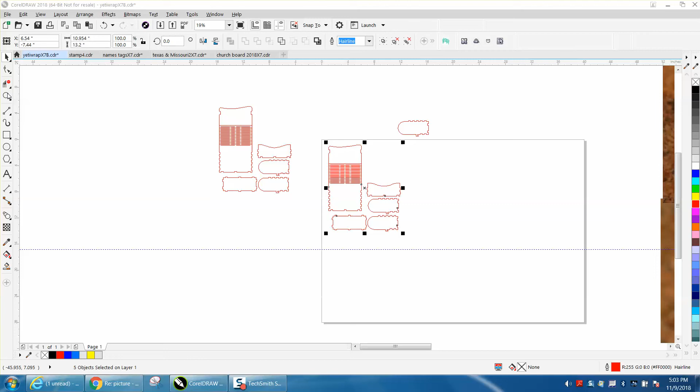Hi, it's me again with Corel Draw Tips and Tricks. We've completed our box, but we need to do a test cut, and then we need to compensate for the kerf.

I've already made a complete duplicate of my drawing, and you want to do that because you're going to fix it and mess it up.

We only need to change the female parts for the kerf factor. I'm going to change all the females so it does not change our dimension, so everything will fit good. So we need all the female parts.

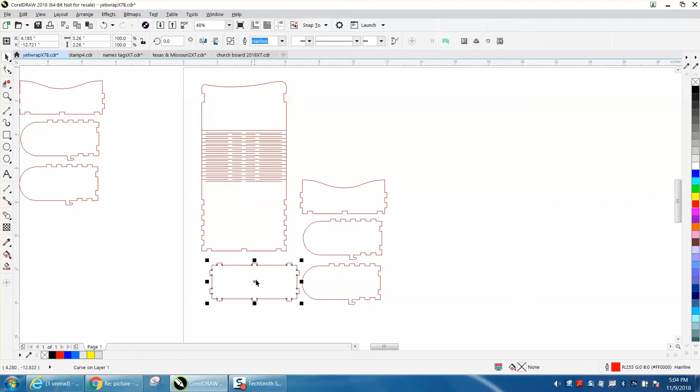We do not need this part. Since you have a duplicate, just delete it. This has all males, this has male and female, but let's just delete them.

These are the two test cuts we need to make. We do need that one. This one has some females and males, and we do need the males.

So this piece we're going to rotate 270 degrees. This piece will fit on this side. As you can see, the kerf is nothing—the lines are on top of each other.

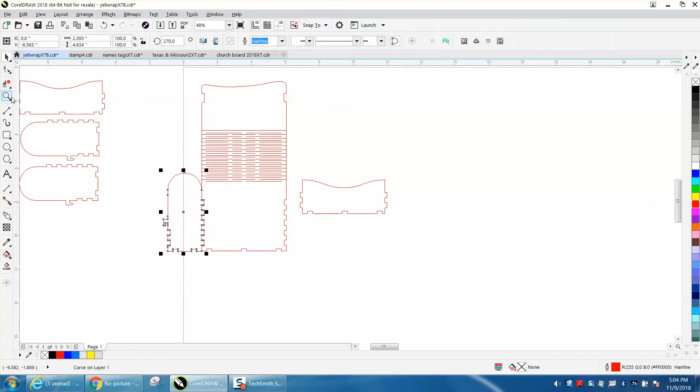If I place it right, it will be—as you can see, the lines are on top of each other. I think you could probably change either one, but if we change the females, you won't change the dimension and you won't get lost.

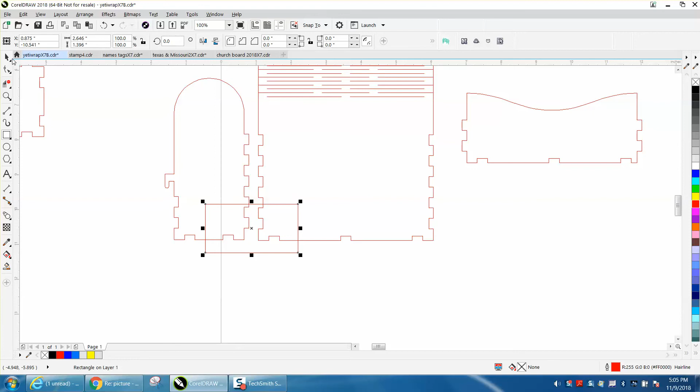Now I was going to show you how to do a test cut. We've got copies of everything. Just take a rectangle, take your virtual segment delete tool, and delete everything.

Delete that. You could actually go in here now and delete this line. It wouldn't really matter. Delete this line. So there's your two joints that you need to test.

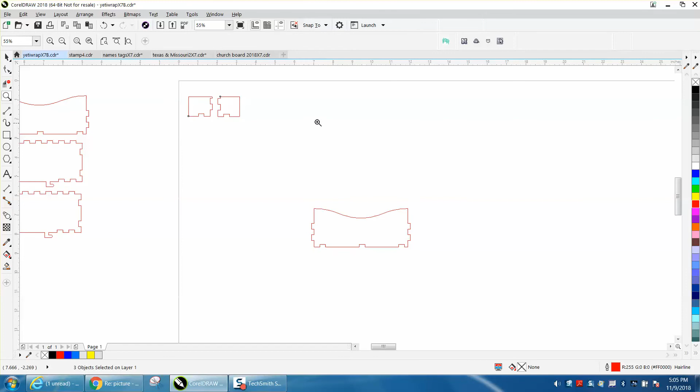Take less than 2 inches of wood, put it up top left corner, cut it out, and test it. I guarantee it's going to be loose because you're going to lose kerf—everything that cuts wood is going to take out a little bit, even the laser.

Normal kerf is probably like 0.03, but we're going to bring this back in now. That's why you made a duplicate. Control D, and we're going to go in and change just the female joints.

And we're going to change our nudge factor now—sometimes my laptop messes up like that—to 0.009.

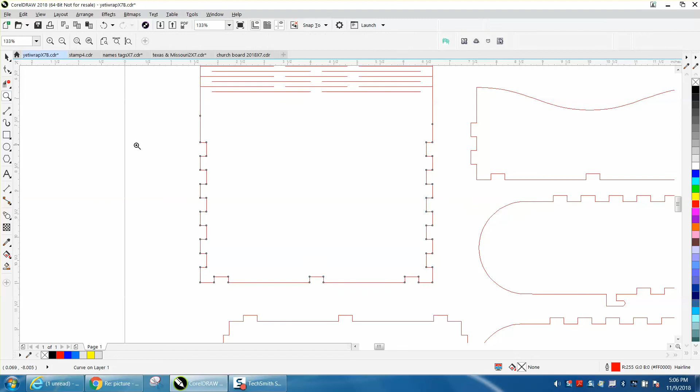Take our shape tool. You're going to have to click on it and ungroup it. Grab your shape tool and think about what you're doing here.

It wouldn't really matter if you did the inside or outside, but we're going to do the inside. I'm going to move this down one nudge. I'm going to go to this one, move it down one nudge. This one nudge, one nudge, one nudge.

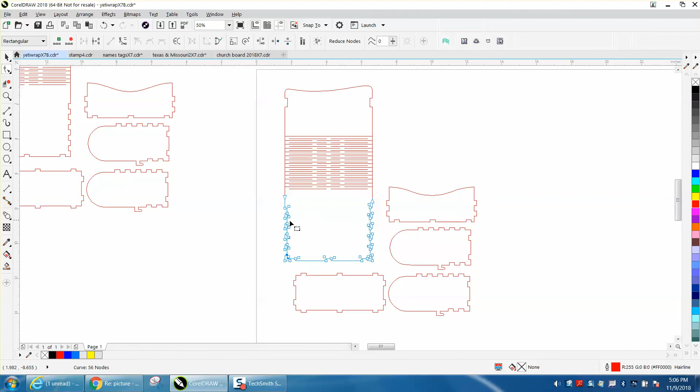So that's done that side, and you would need to do the equal on this side. We'll just go ahead and do it. I think I want to start at the top, one nudge down, one nudge down. So you're doing every other set, and all you're doing is reducing that space for that to fit in.

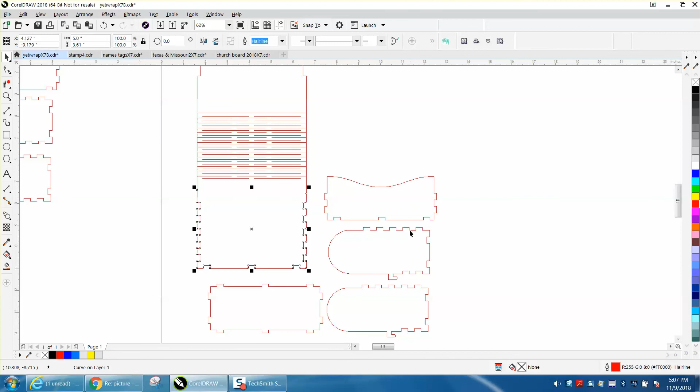Just kind of to prove a point, you would need to do that to all your female parts. If you're either going to do males or females, I did the females.

Let's rotate this thing to 270 degrees, let's bring it up. Once you've done them all, what I would do is do what I just did, and then do that exact same test cut. And there's the difference.

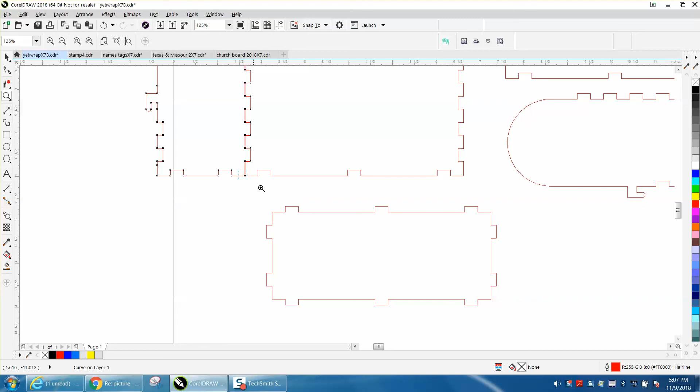You're that far—well, I must not be on here perfectly. I've got a little hiccup in this box, but so there's your kerf.

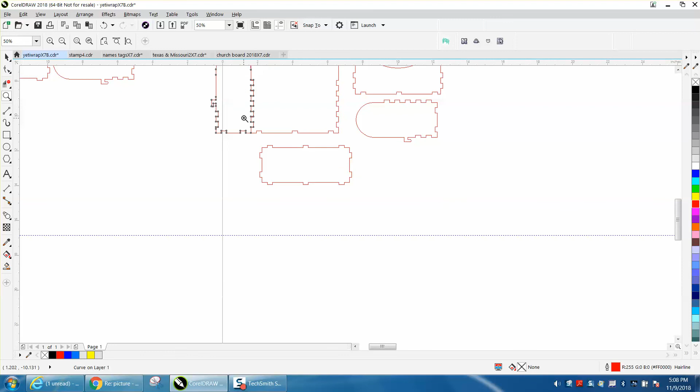That's going to help make the joint tighter because the male and the female are a little closer together. You might have to do that again, but if you do that and do a test cut, and it's too loose or too tight, just back off the number a little bit.

I truly hope that helps somebody. I've had several people wanting to make this box. Take it out the laser, make your test cuts. And I said in one video, the only other joint that might not fit is this clasp.

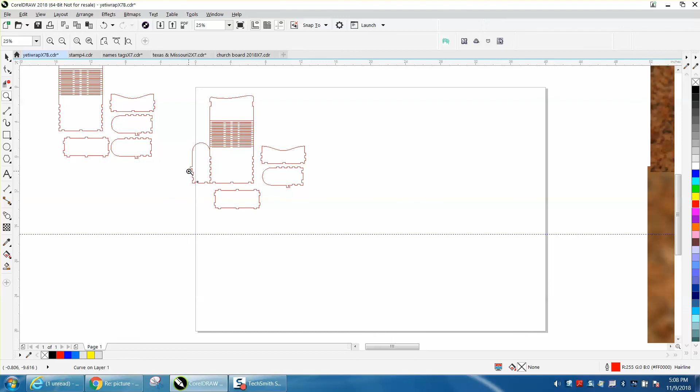If it bends around and doesn't quite fit, it's too loose or too tight, you don't have to recut this piece. Just move this joint up or down, and that's very easily done.

We'll just do it real quick. I've taken enough of your time. Grab those nodes and just move it up or down what you need. You're not hurting anything—we've got enough space in here.

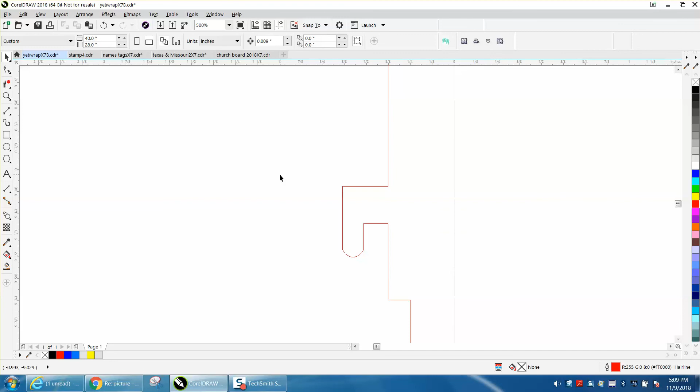If you remember from the other videos, we left this space a little thicker than your wood is, 0.14. The wood is 0.13, or really the wood is 0.125. By the time you sand it—and please sand your work.

If I can't stress it enough, especially on these finger joints, it'll save you a lot—if you can elevate the wood off your vector bed, because there's a lot of lines to be cut, and you're going to hit some knot holes in your plywood, and it's going to char.

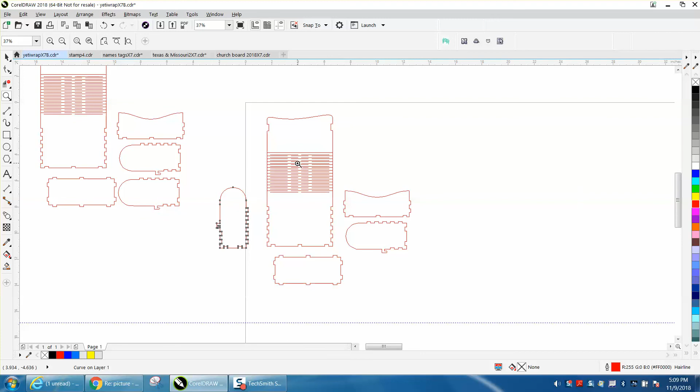It's on the inside, but you're going to open the lid and you're going to see it. Anyway, I really thank you for watching. I hope you watched all of them, and thank you for watching.